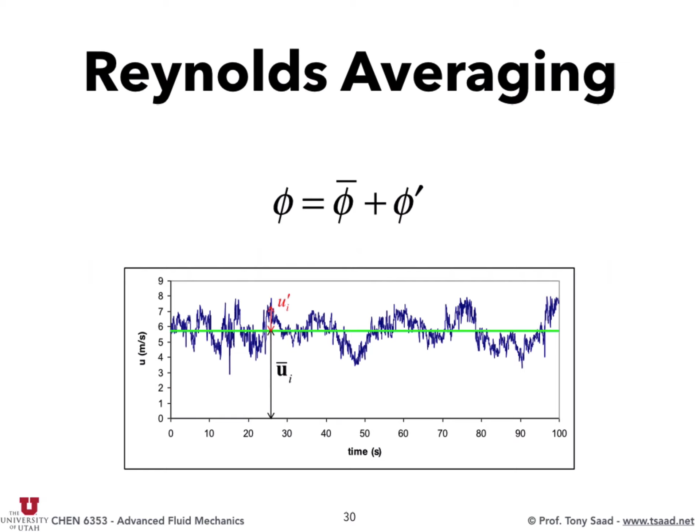However you define that average, it needs to satisfy certain properties. These are the two notations for the average: phi bar, or brackets of phi.

The key property of averaging — and I mention this because there's another procedure called filtering, which doesn't obey the same properties as averaging — so it's important you remember what we mean by averaging.

The average of the fluctuations needs to be zero. That's a key property of averaging. So the way you construct and structure your average needs to satisfy this property.

You don't know what phi prime is, but we know how to construct the average based on the basic equation: the average of the average needs to equal the average. If you do it that way, then the average of the fluctuations equals zero. That's how you enforce this property.

If you take the average of the definition, you get phi bar on the left, and phi bar bar plus phi prime bar on the right. If phi bar bar equals phi bar, they cancel, and you get phi prime bar equal to zero.

The average of the sum is equal to the sum of the averages. The average of a constant times a field equals the constant times the average of that field, where A and B are fields, not constants. And the average of the gradient of a quantity is the gradient of the average.

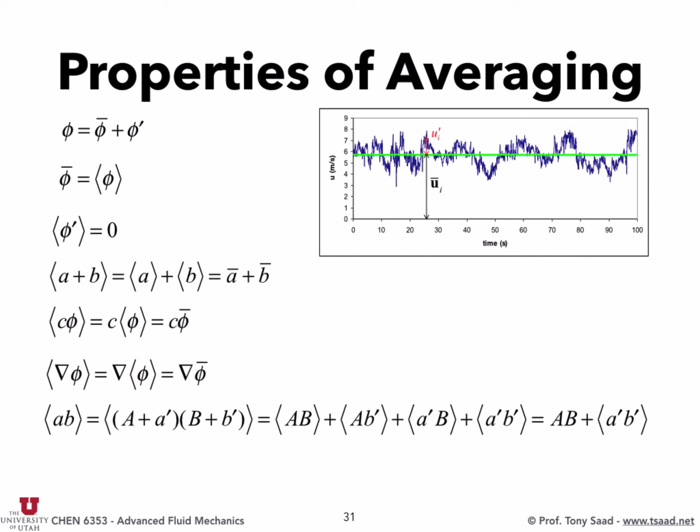So there are several types of averages, which we discussed briefly last time: a spatial average, a time average, or an ensemble average. The ensemble average is an average across experiments — that's my favorite, because it retains time and space dependence.

With a time average, you could lose time dependence depending on the period over which you took the average, which makes your equations steady. When you do an ensemble average, you get an unsteady set of equations instead.

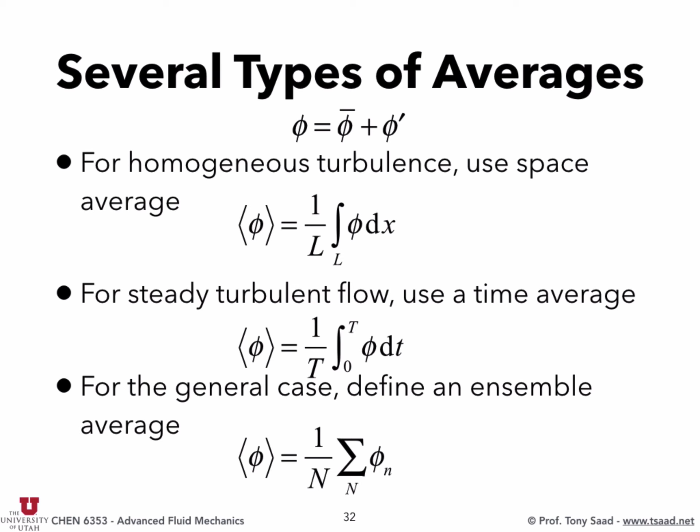The next step is to apply the averaging procedure to the Navier-Stokes equations. We can either substitute U as U average plus U prime and pressure as P average plus P prime and see what happens, or just take the average of the equations themselves — both give the same answer, but it's easier to take the average of the equations.

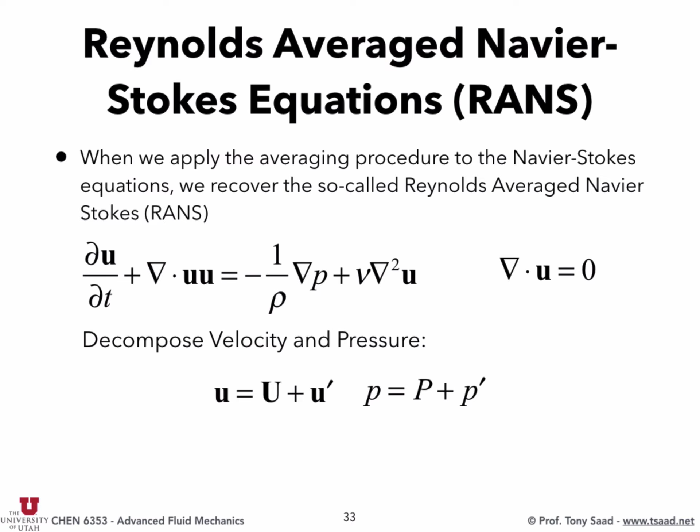So we start with continuity. We take the average of the continuity equation.

Average of div u is div of average u, which means div of the average is equal to zero. In other words, the averaged quantity still obeys mass conservation.

Now why are we doing this? Let's step back for a second. What I want now is a working set of equations for the averaged properties of turbulence, and then whatever is left we're going to figure out what to do with. We said we cannot solve the equations for turbulence directly because they're too expensive. So instead, let's write all the quantities as an average plus a fluctuation, and then find transport equations for the average that we can solve, and whatever is left we're going to model. That's the idea behind turbulence modeling, really.

Now another property: if the average velocity is mass conserving, this also implies that the fluctuating velocity is also mass conserving. That's simple, because u is u average plus u prime. Div u equals zero equals div u average, which is also zero, plus div u prime, and that means div u prime is equal to zero. So I may ask you about this in the exam: show that the fluctuating velocity is divergence free.

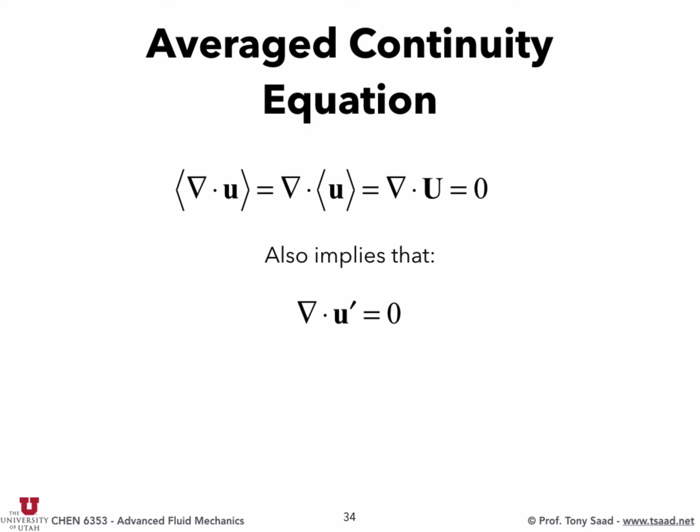Okay, averaged momentum equations. We do the same thing. We start with the momentum equations. Now, before we even do anything, which term do you anticipate is going to give us problems? Yeah, del dot uu, or u dot grad u, right? The convection term. That's going to give us problems because it's a nonlinear term.

The other terms, the average just goes into the gradients, into the nablas, inside the derivative. So when we take the average, we get dU average by dt plus the average of div uu, which is the problem term, equal to minus one over rho grad average p plus nu del squared average u. So when you think about solving for the average quantities, well, these are average quantities we're going to solve for, except for this term. We don't know what to do with this term yet. It's not an elementary quantity, it's a complex quantity.

All right, so that's what we end up with. Remember, I'm using another notation here: I'm replacing the U average with capital values, not U bar. So that's another notation as well. Hopefully this is not confusing.

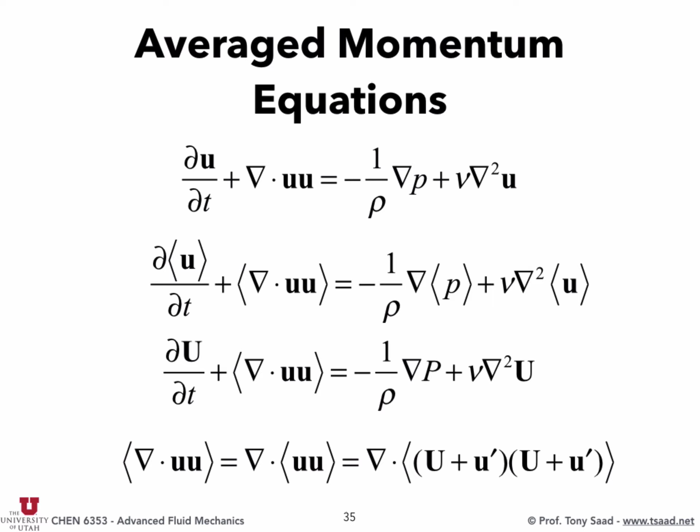So what do we do about the convection term? We have div uu, the average of div uu, and the average goes inside the derivative, giving us div of the average of uu. Remember, this is the total velocity field, including the fluctuations. Then we do the decomposition as u plus u prime, times u plus u prime, and simply carry out the multiplication.

Now what about this term, div of u times u prime? Remember, this u is an average quantity, so think of it as coming out of the average, like a constant, because the average of the average is really the average. So this average comes out, and you get 2u times div u prime. And div u prime is zero, the div of the average of u prime is zero, and div u prime is zero as well. So this term disappears, and you're only left with this guy.

So div uu is in terms of average quantities, and the only unknown term is this one. When I say unknown, I mean the average quantity is unknown, but we can solve for it numerically—you set up your grid and solve for it. But we don't have any equations for u prime. All our equations are for capital U and capital P.

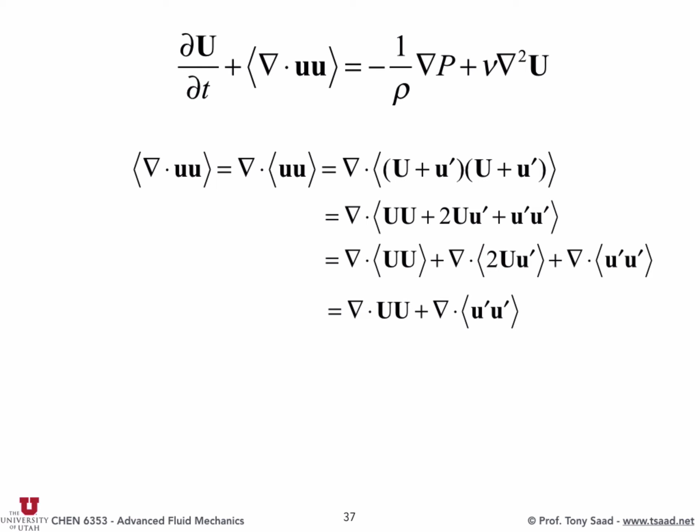So now we look at the average momentum equations. The first few terms look exactly like the Navier-Stokes equations: dU by dt plus div UU equal minus one over rho grad P plus nu del squared U, except that the meaning of U and P are average quantities, not instantaneous turbulent quantities. But then you have this additional term, div of u prime u prime.

Now, u prime u prime itself is a tensor. It's got nine components because you have u prime, v prime, and w prime, and when you combine them you get this tensor—we call this the Reynolds stress tensor because it turns out to have the same units as stress.

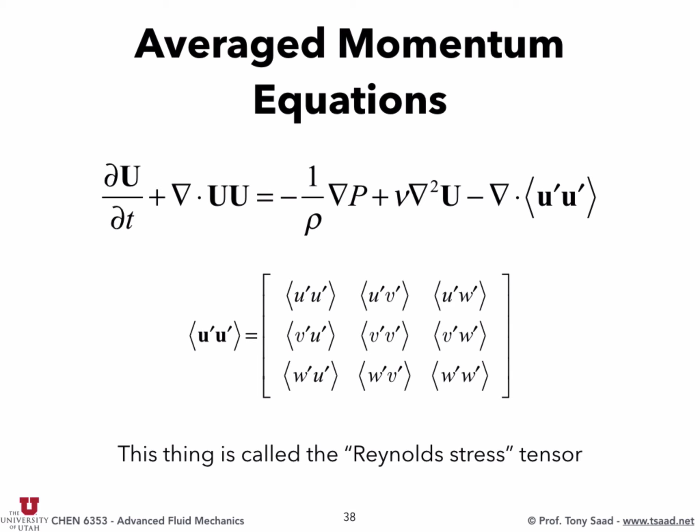Interestingly, although it comes from the convective term, it looks like a stress tensor. That gives us the Reynolds averaged Navier-Stokes equations. So we have div u equals 0, and then Navier-Stokes on the average quantities minus this little term. So now we're almost there. We expressed everything in terms of the average quantities, except we still have an issue.

So how many unknowns do we have here? We have u, v, w, 3 unknowns, p, 4 unknowns. And if this tensor is symmetric, we have 4, 5, 6, 7, 8, 9, 10 unknowns. Agree? So you have u, v, w, p, 4 unknowns, and then 6 coming from the Reynolds stress tensor, so 10 unknowns. But how many equations do we have?

1, 2, 3, 4. So 3 for momentum, it's a vector, and 1 for continuity, same as before. So really, in reality the stress tensor - I made a mistake. These are 3 additional unknowns, not the product terms themselves - it's u prime and v prime that are the unknowns. So we have really in total 7 unknowns: u, v, w, p, and then u prime, v prime, and w prime. So 7 unknowns, not 10.

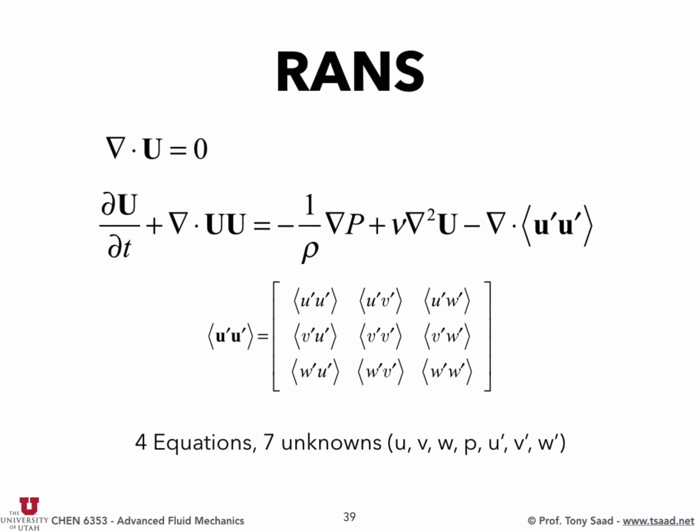So that gives you 4 equations and 7 unknowns, and that's called the turbulence closure problem. If you've heard someone talk about turbulence closure, that's it. When we average the equations, we end up with these nonlinear effects of turbulence that we have no equations for. We don't know what to do with that term.

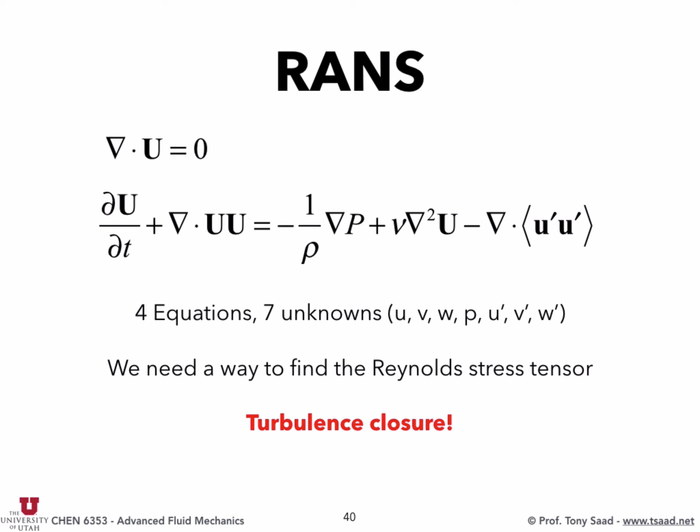To generalize the notation a little bit, since we said this looked like a stress tensor, we're going to give it the same notation we used before, and rewrite the equations this way. We'll put the stress tensor - remember our molecular stress tensor, molecular diffusion, looked like div tau - and then we're going to call the turbulent stress tensor div u prime, we'll call it tau turbulent. That's the turbulent stress tensor, the Reynolds stress tensor.

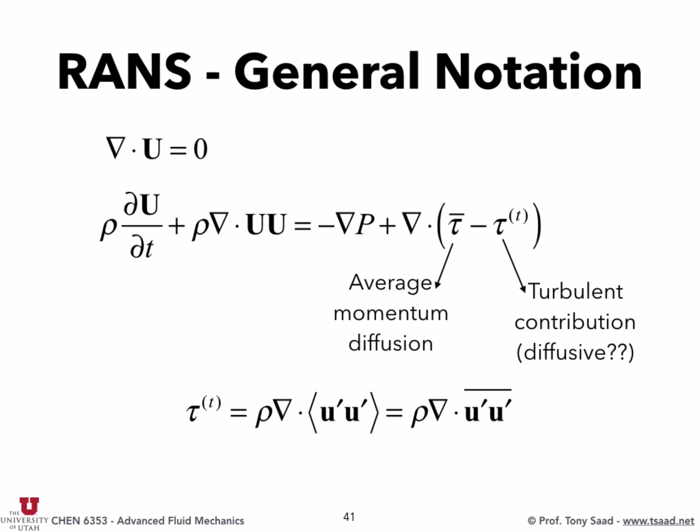Now, I'm writing it this way because it's going to help us think about what we're going to do with turbulence models. But we still have a closure problem - we don't know what tau turbulent is.

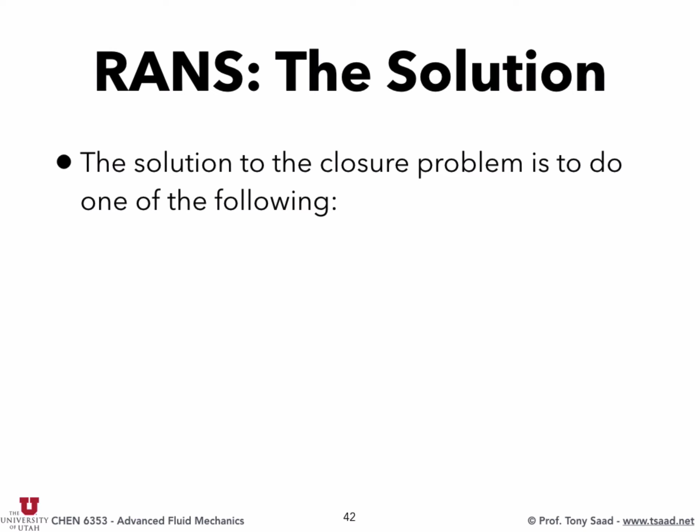So how do we solve the closure problem? We either model the stress tensor - say tau turbulent is equal to tau molecular. Why not? It looks like a stress tensor. Turbulence is in effect a dissipation mechanism, so the effects of the Reynolds stress tensor should be dissipative in nature, and therefore similar to molecular dissipation. So why not model it as something equivalent to the molecular stress tensor? That's one model.

Or, we can develop more equations for the stress tensor. But what does that mean? We developed an equation for the mean, and that gave us an unknown, u prime. Now if we develop an equation for u prime, we're going to get an unknown for u prime and v prime, a triple correlation. And if you develop an equation for that, you get a quadruple correlation, and so on. But you will always have the closure problem - you have to stop somewhere and model that term in the end.

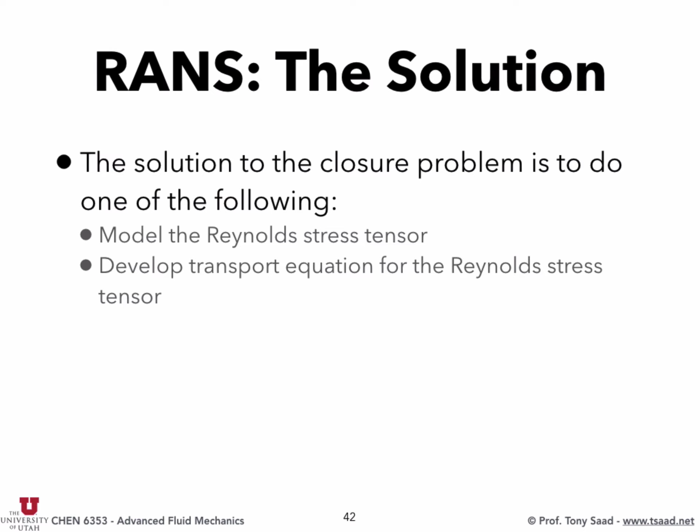It just gets really complex. We're going to go over all of these models - we're skimming the surface here, just to give you an idea of what turbulence modeling is about. It's a big field; people dedicate their lives to developing turbulence models.

Now, what's generally adopted in the community are two classes of models: first order and second order models. In the first order models, we directly model the double correlation u prime, u prime. So although that's a second order moment - if you know some statistics, u prime u prime is a second order moment of the correlation function - that's what it's called, but we attack it directly, so we call it first order, attacking directly on the second order moment. The second order models attack the triple moment, the triple correlation, the third order moment.

Now some nomenclature: in the first order models, where we directly model u prime, there are zero equation models that directly model u prime.

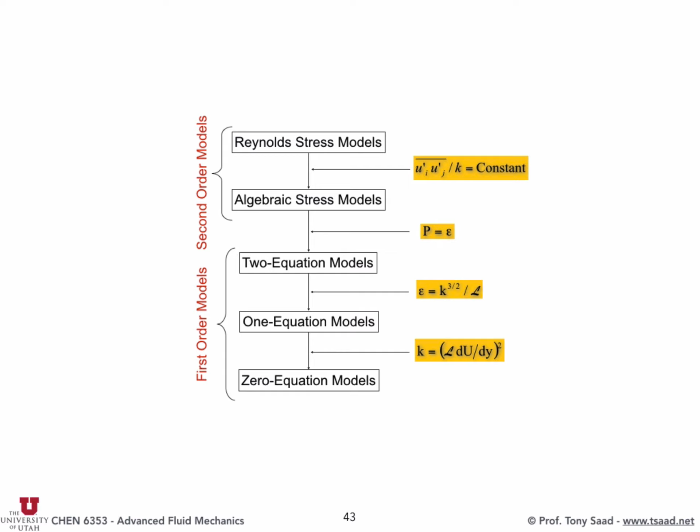There's the one equation models, where you write U prime as a function of something—kinetic energy—and write an equation for that. Then there's the two equation models, like the K epsilon model, have you heard of it? No? Okay, so some have. The K epsilon model is a first order model with two equations. It directly models U prime as a function of two new quantities, K and epsilon, kinetic energy and dissipation rate. We'll look at it, and then write equations for the kinetic energy and dissipation rate, transporting those as well. So it's a hierarchy of models.

First order models directly model the Reynolds stress tensor. It starts with the analogy we just talked about—Boussinesq, I think, came up with that, and then Prandtl picked up on it. They said, well, in general turbulence is dissipative in nature, so the Reynolds stress should probably look like, on average, the Newtonian stress tensor. If the Newtonian stress tensor is given by tau ij equals mu or nu, dui by dxj plus duj by dxi, then why not write the turbulent stress tensor, minus rho U prime average, as some viscosity.

That is different from molecular viscosity—a turbulent viscosity—but multiplied by the strain rate, which measures the average deformation on a fluid element in terms of the average velocities, capital U, which we know because we have equations for those. Those are part of the unknowns we already counted: U, V, W, and P, the four unknowns. So if we can express U prime in terms of the unknowns we're solving for, we're good—we close the system. Think about this: we simply removed div U prime and replaced it with something containing capital U, and that closes our system of equations.

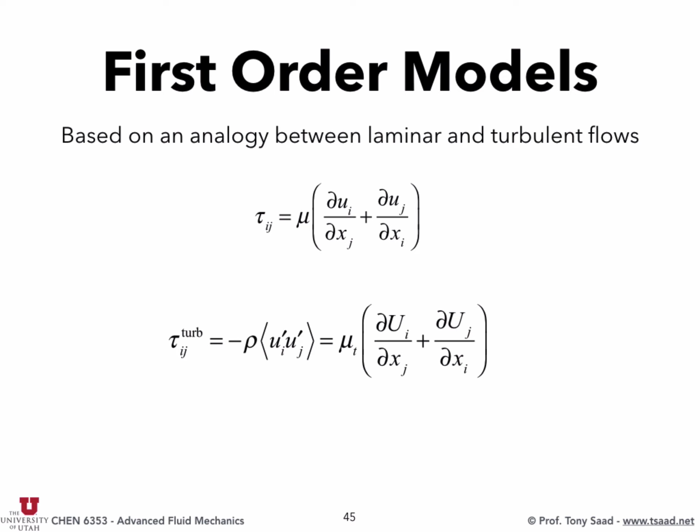The only unknown left is this constant, or thing that may vary in space, mu t, the turbulent viscosity. So the goal of all first order models—K epsilon, K omega, RNG K epsilon, whatever you find—is that they all use this form for tau turbulent. This is fixed, but they figure out fancy ways to compute mu t.

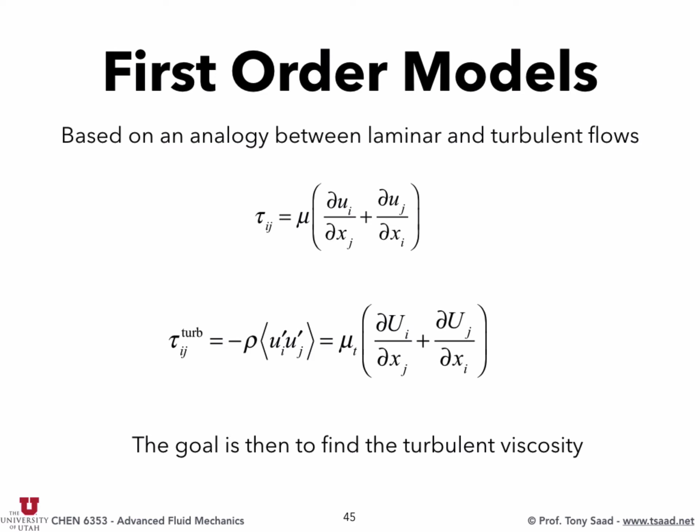When we replace this assumption into the governing equations for incompressible flows, this is what you get: you still have div u equals 0, and you have the Navier-Stokes equations, except that we've augmented the molecular viscosity by a turbulent viscosity. See where we started—something very complex becomes something quite practical. This essentially says that, on average, the effect of turbulence is to dissipate a little bit more, so it's like augmenting molecular viscosity. This is for all first order models.

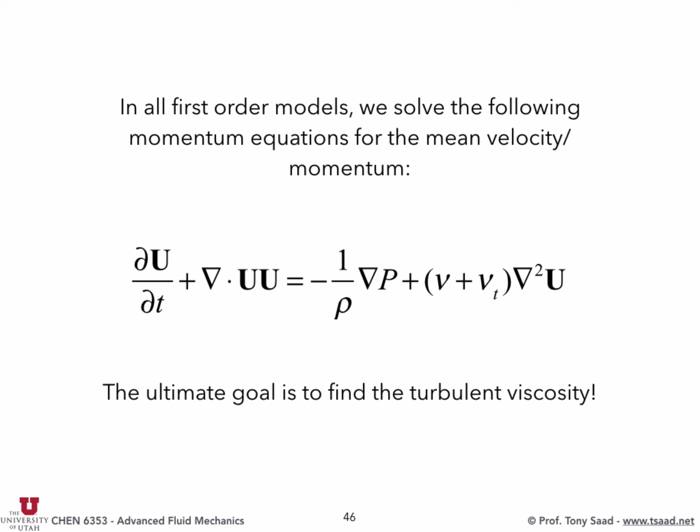Now, the research within first order models is computing nu t or mu t. We start with zero equation first order models. By definition, these immediately express mu t algebraically without solving any extra equations—they give you an algebraic relation, mu t equals something.

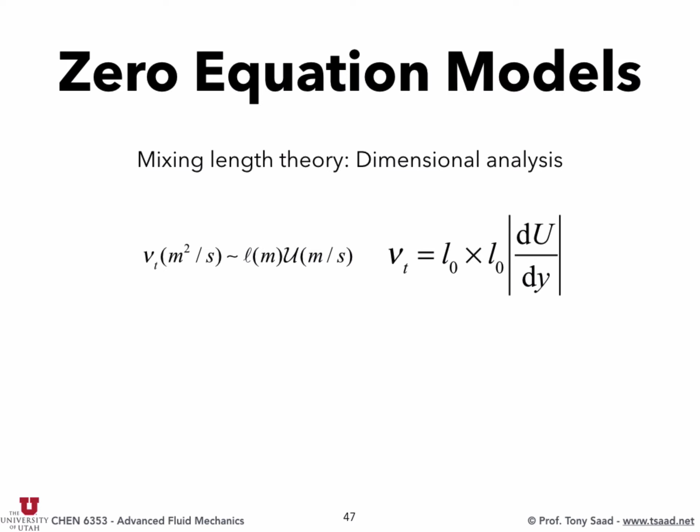This is where Prandtl introduced mixing length theory, which is on average the distance an eddy travels, like the mean free path, before it diffuses. From scaling arguments, nu t is meters squared per second, equal to a length scale times a velocity scale. The length scale is the mixing length—the distance through which an eddy travels as it diffuses—times the velocity scale. Going through the paper, they end up positing this form: a mixing length squared times a gradient of the velocity. This would be a known quantity because we're solving for u, so we can compute du by dy. The challenge is just figuring out the mixing length.

So we moved the problem from mu t to the mixing length. There are numerous arguments from boundary layer theory, from kinetic theory, or just from experimental observations, or making an educated guess. You can fine-tune that mixing length, for example, to test your code against the decay of isotropic turbulence.

We have good observations on the decay of isotropic turbulence. I'm going to fine-tune my mixing lengths so that I capture that decay correctly, set that value in your code, and just apply it, crossing your fingers.

In the end, it's just added diffusion, just added diffusivity. In some problems it may be really important, but for many engineering applications specifically, you don't care that much. It's just a number.

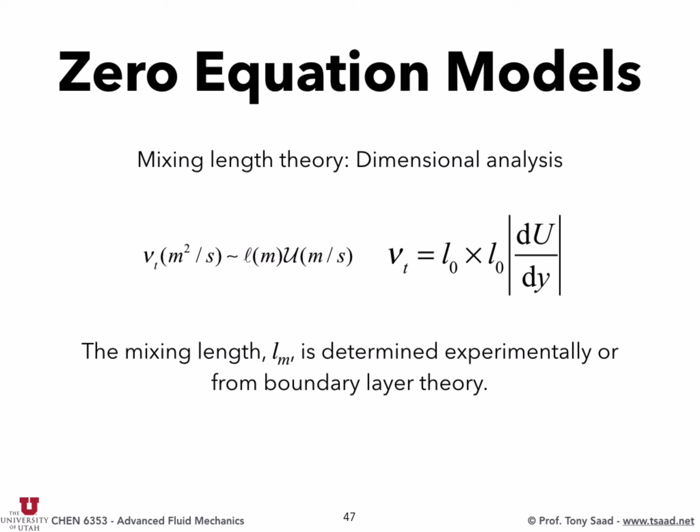Advantages: this is very easy to implement. It's really fast because you're still solving the Navier-Stokes equations. You just augmented the molecular viscosity by a turbulent viscosity, equal to a number times the gradient of the velocity—the mixing length times the gradient of the velocity. So it's really simple to implement, fits within any standard code, you don't have to write any new equations. We can do this from the input file in my code, in Wasatch.

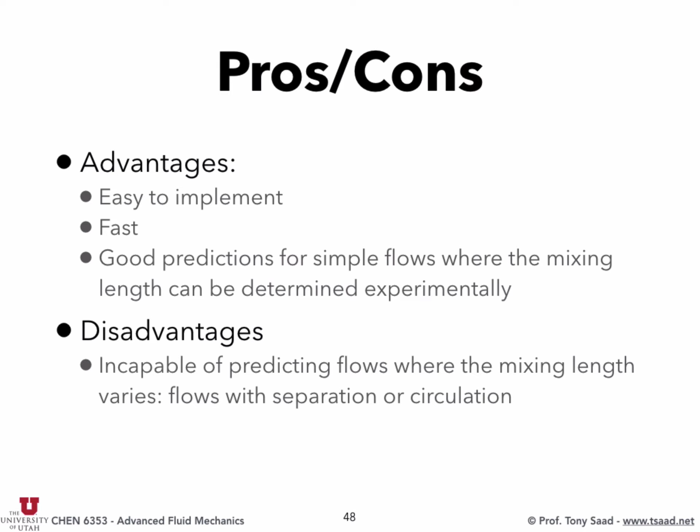Good predictions for simple flows where mixing length can be determined experimentally. The problem is it's incapable of predicting flows where the mixing length varies, like where you have separation or recirculation flows behind blunt bodies, etc. But people still apply it there.

So now we go to the one equation model. The next level in the hierarchy is to express the turbulent viscosity in terms of another quantity that we transport—meaning a time-dependent differential equation. So the one equation models, as the name designates, the goal is to express the turbulent viscosity in terms of a quantity that we write an equation for. But we're still first-order models, because the first-order model directly models the Reynolds stress tensor.

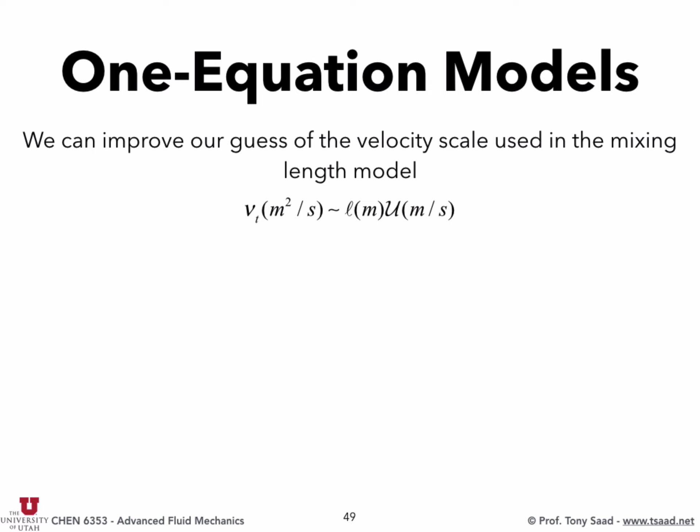So again, nu t is L times u, that was the mixing length. We can improve our guess on the velocity scale using the mixing length. Previously we said u, the velocity scale, was L times du by dy. But what if we pick another scale for the velocity? One quantity is the turbulent kinetic energy. Obviously kinetic energy is very important in turbulent flows, so why don't we model the velocity scale as a function of the kinetic energy?

The idea is you write u, the velocity scale, as the square root of the turbulent kinetic energy. And what is the turbulent kinetic energy? It's a function of a scale, one over two u prime—this is the kinetic energy of the fluctuation. That's what's important here. But we don't know what u prime is, and we don't care about that.

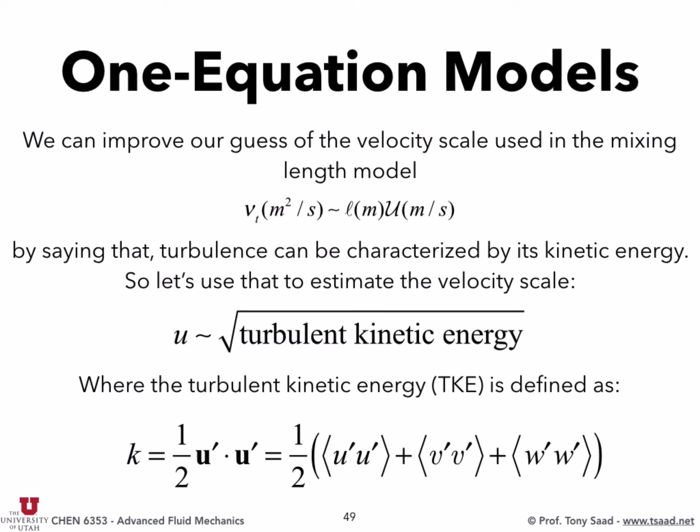So that's the equation for the transport of the turbulent kinetic energy. Think again about what we did here: we said nu t is still equal to a mixing length, which we still have to compute somehow from experiment or a guess. But then we replace the velocity scale by the square root of the turbulent kinetic energy. But where do we get the turbulent kinetic energy from? We need an equation for that.

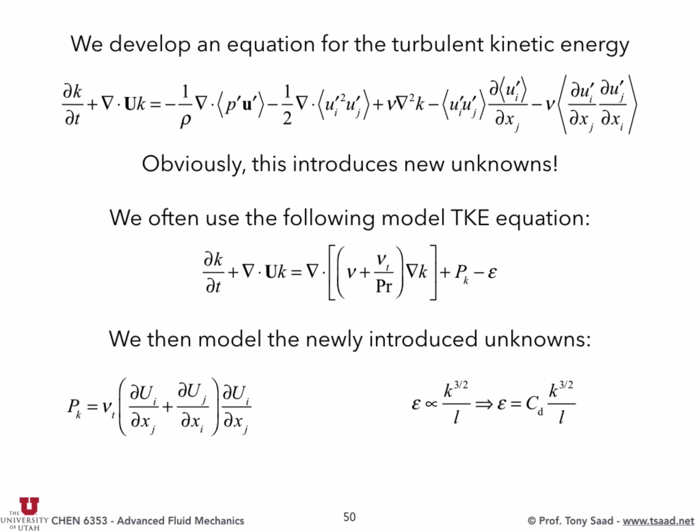With scaling arguments, we say the turbulent viscosity needs consistent units. This is meter squared, this is meter to the fourth per second to the fourth, and this is meters squared per second cubed. So that gives you meter squared per second for nu t. This ratio of kinetic energy squared over the dissipation rate is what the two equation models use, and that's the K epsilon model, K and epsilon.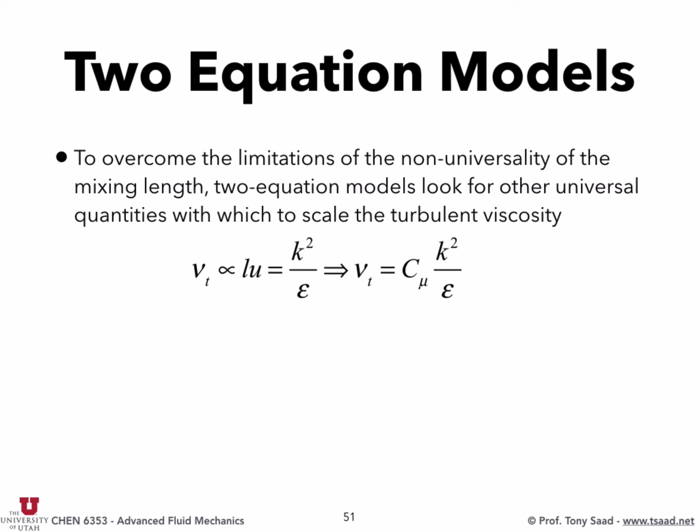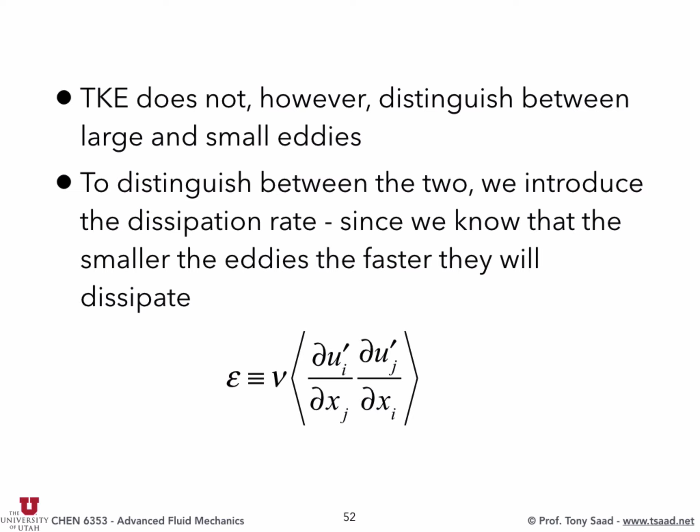Now we've introduced two new unknowns, K and epsilon. So obviously we need equations for those. By the way, by definition, this is the dissipation rate, the rate at which turbulent eddies dissipate. Just a definition. And that gives us the K epsilon model.

So now we have two equations. We introduced two new unknowns, K and epsilon. We need equations for those because obviously kinetic energy changes in space and time, and so does the dissipation. The dissipation is going to be higher when there are small eddies, and lower when there are large eddies. But kinetic energy can have the same value for both. So with K and epsilon, we can account for the difference between large and small structures.

So these are the equations. There are a ton of approximations introduced here, because obviously those are going to have a lot of unknowns, like we've shown for the kinetic energy equation. I'll give you the slide so you don't have to worry about writing all of this. But this is the K epsilon model. On top of continuity and momentum equations, so four equations, you solve two more equations.

These are very easy to solve numerically because they're just scalar transport, just moving them in time. You have everything on the right-hand side, you advance in time. Very easy to implement. This is the most popular turbulence model in the world, the K epsilon model. You open up a simulation, you have turbulence, turn on the K epsilon model. That's pretty darn good, one of the best models out there.

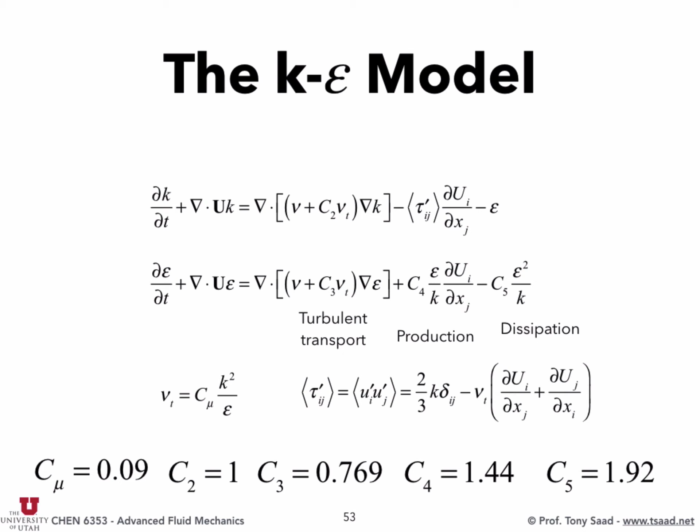Its competitor is the K omega model, but it has a very similar flavor. When you see K epsilon model, just pick the K epsilon model. It's pretty darn good, it's my favorite turbulence model when I'm doing RANS. This is Reynolds averaging. My favorite turbulence model overall is large eddy simulation, which is something different we'll talk about. K epsilon model is easy to implement, always leads to stable calculations. All RANS models are pretty darn awesome.

They always converge because you're adding so much diffusion, and diffusion has a stabilizing effect. It just diffuses crazy gradients. You have a sharp gradient, it automatically diffuses it.

Good predictions overall, but poor predictions for swirling and rotating flows. Nobody really cares about that, though.

They still use turbulence models, unless you're designing wind farms, like what Professor Sutherland was talking about the other day. Then you would have to worry about getting into the finer details.

It depends on what you're after. If you want to resolve the fine details around a drone, or the rotors and blades, you probably don't want to use the K epsilon model—you probably want DNS over there. But if you want the average properties of how the flow looks, just slap on the K epsilon model and you'll be just fine.

A bunch of other flows with separations—again, that's a problem with the mixing length approximation anyway. Governing equations may be stiff in some regions of the flow, but still we can use implicit schemes. The kinetic energy approaches zero near the wall because you're trying to satisfy no-slip over there, but there are models for that, near-wall models. All of these are fixable issues.

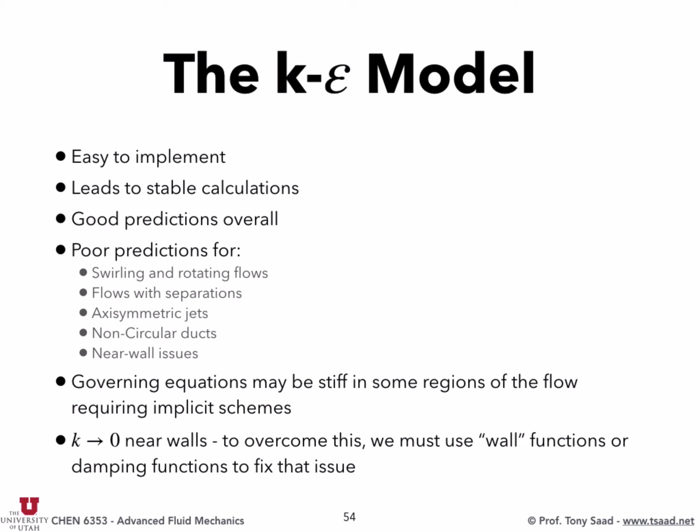Other two equation models. So we're still with the first order models, which directly model the Reynolds stress tensor as a turbulent viscosity times the rate of strain. All of these—zero equation, one equation, and two equation models—try to model the turbulent viscosity.

Zero equation models directly posit a form for the turbulent viscosity: mixing length squared times velocity gradient. The one equation model expresses the turbulent viscosity as a function of the kinetic energy and writes an equation for the kinetic energy. The two equation models express the turbulent viscosity in terms of K and epsilon, or K and omega, or two other quantities, and write equations for those two other quantities. Examples include the nonlinear K epsilon model, realizable K epsilon model, renormalization group theory, K omega, etc.

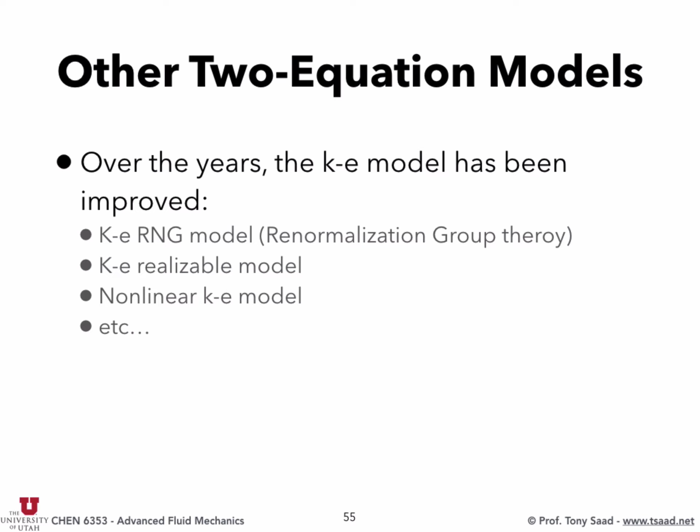Now, some may be interested in scalar transport, so I'm going to put a slide about this very quickly. Similar to momentum, scalars are transported by fluid flow, and this is very important. Scalars are also affected by turbulent flows.

Think about the velocity as transporting a quantity like temperature. If the velocity fluctuates, the temperature will fluctuate as well. As a working model, I'll give you a simple advection diffusion equation for temperature. The same way we decompose the velocity into average plus fluctuating, we're going to decompose the temperature into average theta—since I can't use capital T for average, and lowercase t is reserved for time—plus a fluctuating temperature T prime. Then you take the average of the equation above.

The problem term is going to be the advection term, because the average goes straight in for all the other terms. You get a problem here with the average of u times t, same as what we did before. This gives you u times theta—the product of the average velocity times the average temperature—plus the average of the product of fluctuations. This is identical to what we did before: we recovered the original equations, except everything is now average, and we added a term that showed up because of turbulence.

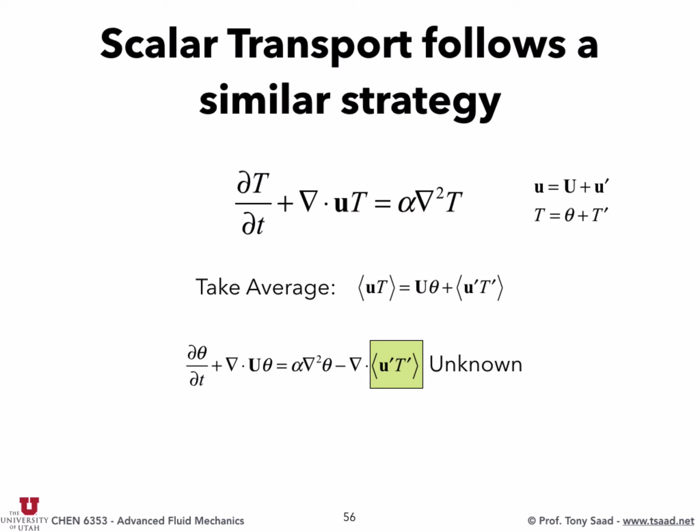In momentum, we said the Reynolds stress mimicked diffusion—mimicked the Newtonian stress. Think of this as something similar. What is the effect going to be—is it going to be similar to this term, do you think? Yes, that's the same hypothesis: just like for momentum, the Reynolds stresses represent diffusion. For scalars, this unknown term, the stress equivalent for scalars, is also a diffusive process. So why don't we model it just like a Fourier diffusion term, called the gradient hypothesis?

So we say u prime t prime—remember this term is div alpha grad theta, right? That's the standard form if you have a nonlinear diffusion coefficient, written as div k grad t. So what if we model this term as a turbulent diffusivity times the gradient of the average? That's how we close the system.

Typically, when you substitute this back in, and assume alpha t is constant, you get an augmented molecular diffusion: alpha plus alpha t, del squared theta. Same idea, same concept—is it starting to ring a bell? We could have set out from the beginning by saying we're going to model turbulence, solve for the average quantities, and augment molecular diffusion by a turbulent diffusion.

Now, how do we compute this? The reason we don't need fancy models here is that we can relate the turbulent diffusivity to the momentum diffusivity via the Schmidt number. So you spend a lot of effort computing the turbulent viscosity, then you set a Schmidt number, 0.71, and from that you back calculate the scalar diffusivity.

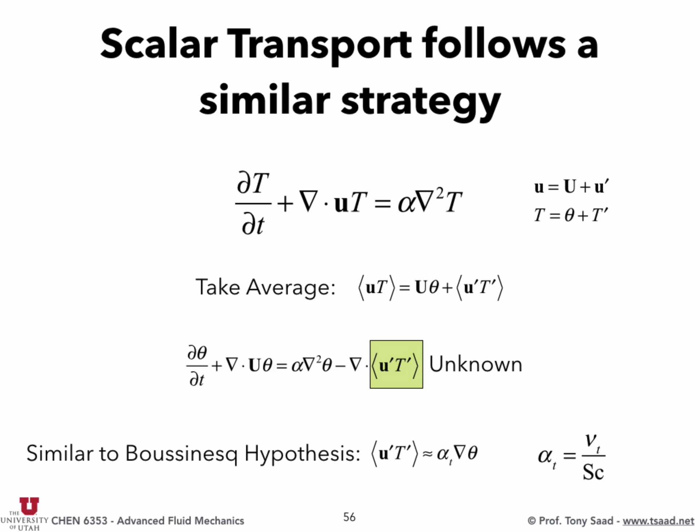Second order models are very complicated and annoying. We don't even have enough slides to put the equations down, or like 20 pages for the Reynolds stress model, really complicated. But the idea is, rather than directly modeling the second order moment, u prime, let's write a transport equation for it.

That is going to give you a triple correlation, ui prime, uj prime, uk prime, which is unknown as well. So we would have to either write an equation for that, making us a third order model, or model that triple correlation. That is much, much harder to think about.

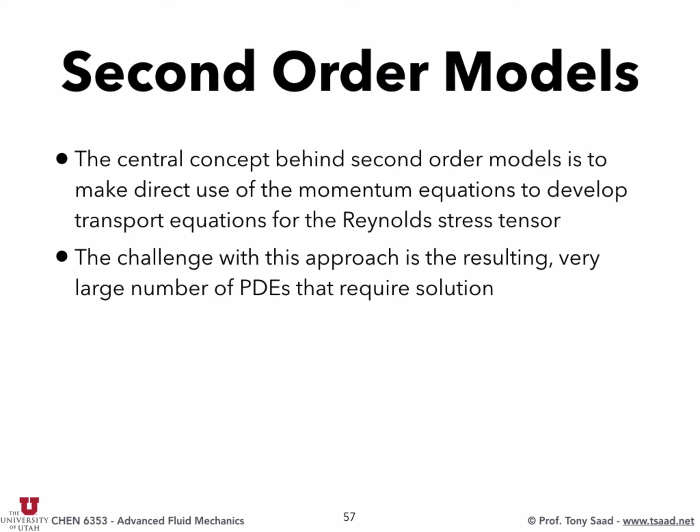The problem with this approach is that the number of partial differential equations you have to solve just explodes, and I don't see anyone using this beyond academic circles. Fluent has a Reynolds stress model, but I don't think anyone even cares about using it. But the beauty of the Reynolds stress model is it captures anisotropic effects. That's been proven. So what are anisotropic effects?

Naively, isotropy is wherever you look, you see the same thing, right? Things on average are the same. Like the universe is isotropic - you look in that direction, there are stars, galaxies, supernovas, black holes. You look in another direction, stars, galaxies, supernovas, black holes, right?

But anisotropy is like you're in a piece of wood, for example. If you look in one direction, the fibers are aligned that way, and you look the other direction, it's all wood everywhere, so it's homogeneous, but it's anisotropic. So if you apply tension to the wood that way, it's going to break much easier than if you take a 2x4, clamp it, and try to break it aligned with the fibers. That's an anisotropic material, from the perspective of the stresses.

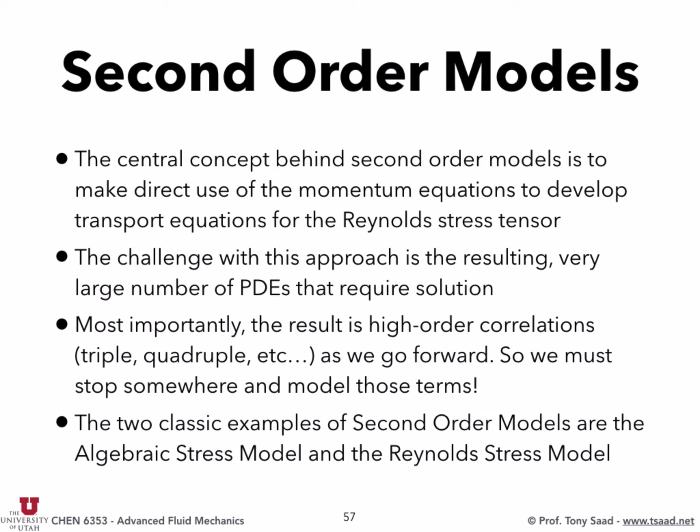Same thing - turbulence is generally anisotropic. You look in different directions, gradients are going to be different, you're going to have different length scales. However you define anisotropy, turbulence is generally anisotropic. So the Reynolds stress model will capture this anisotropy. You write an equation for the second order moment, but then you end up with terms that have third order moments, and those need modeling.

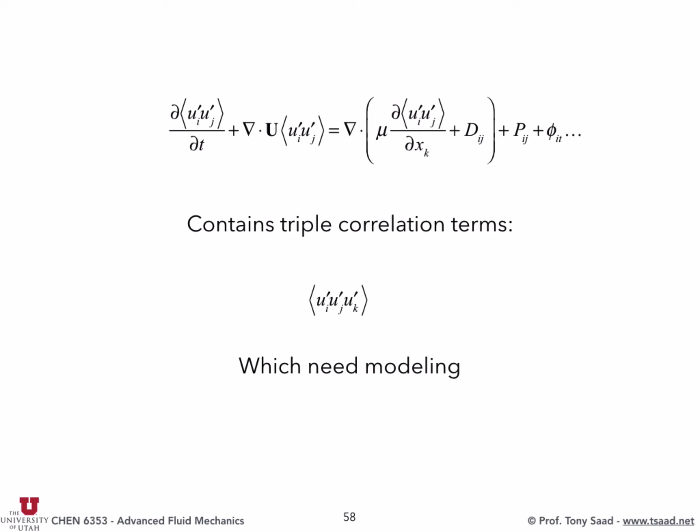So in second order models, you model the triple correlation, or write one equation models for those, or two equation models for those, and so on. In third order models, you write an equation for the third moment, then model the fourth moment, and so on. The Reynolds stress model is very expensive, but it's one of the classic turbulence models.

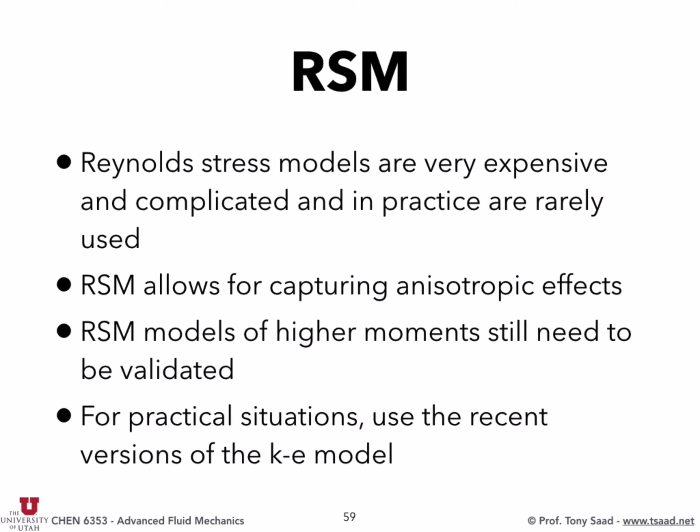I have 6 minutes, and I will introduce you to my favorite and kind of up-and-coming turbulence approach, because it's become much cheaper and easier to compute due to processing power. As we move into more processing and cheaper computing, we're moving away from turbulence models because it becomes easier to capture more of the turbulence. Ideally, with very fast computers, we don't need 5,000 years to solve flow in a channel or pipe - you can compute all of that. So large eddy simulation is kind of the first step towards full DNS, direct numerical simulation.

Large eddy simulation - the idea is, well, we have a grid. If you remember that energy spectrum I showed you in the past, Reynolds averaging models the entire spectrum - all scales, everything, from large to small scales. In DNS, we compute everything, so you have to have a very, very fine grid. In LES, we compute some and model some.

The idea is, well, I have a grid, and I can compute things on the grid. Why don't I compute everything turbulent that grid can capture - all the eddies that can be captured by that grid - and then model everything that cannot be captured by that grid? Remember the eddy drawing I showed you the other day? So let's compute the smallest eddy that can be computed on that grid.

Just solve the full equations there, and anything below that, let's approximate it. But how do you make that separation? With averaging, we said we're going to take an average and solve the average equations. But with this idea, how do you make the separation between the scales that are computed by the grid and the scales that fall through the grid? So we're going to talk about this.

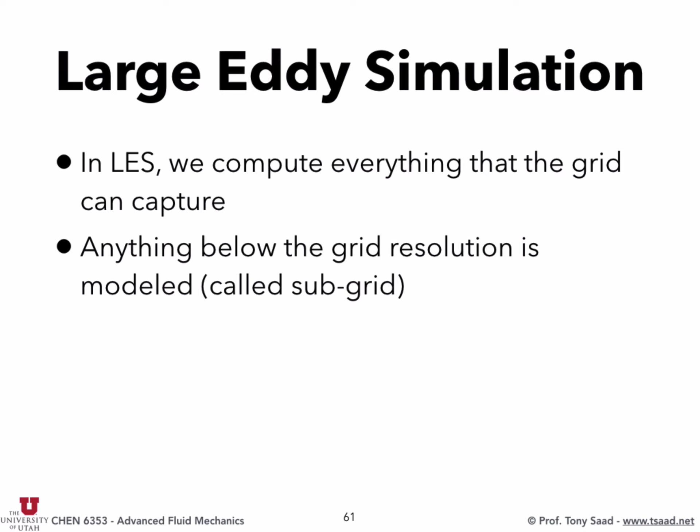In LES, we compute everything that the grid can capture, and anything below the grid resolution is modeled. For things to be meaningful, the grid resolution needs to be large enough, meaning the number of grid points needs to be larger than what RANS can do. Think of yourself moving along the spectrum of kinetic energy. You want to compute as many small scales as you can, and then model everything else.

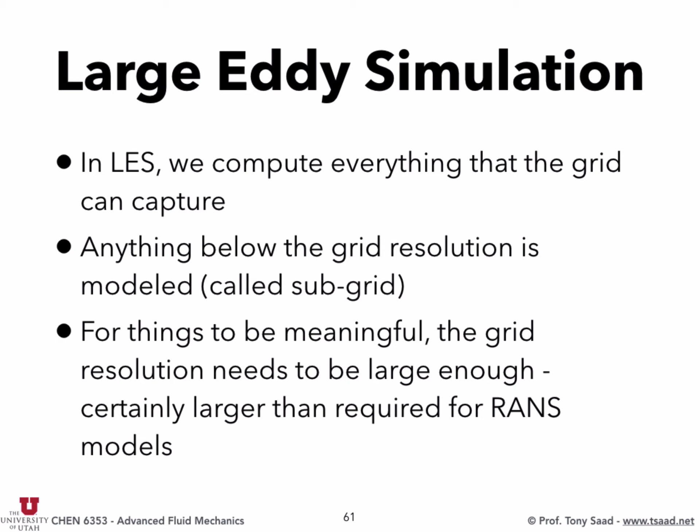Now, to separate between the scales that can be computed and the scales that are not computed, we introduce the idea of the filter. I'm not defining the filter yet, because what's more important to realize is the properties of the filter rather than the filter itself. In the end, the grid is going to be your filter.

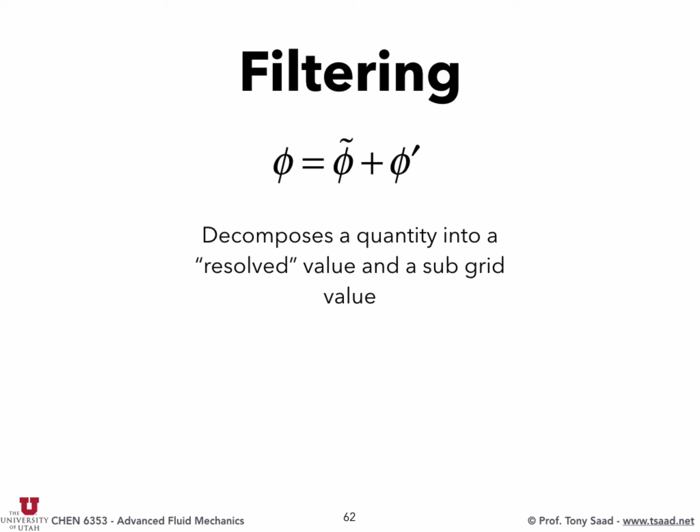Now, filtering looks identical to averaging. You take a turbulent quantity, you write it as a filtered quantity, so that's the quantity captured by the grid, plus the quantity that was not captured by the grid. Same concept. Now think of filtering as a sieve. The finer your sieve, the more pebbles or stones you can capture. The coarser your sieve, the less you're going to capture. Filtering is the equivalent of the sieve.

It's going to capture things that are larger than the sieve width or the filter width. So that introduces the idea that a filter has a length scale that allows it to capture all quantities that are larger than that length scale, and everything below that length scale disappears. That's why the idea of the filter is important. It's a sieve, think of it as a sieve. This actually looks like a grid, like a structured grid, literally. Any eddy that is smaller than the sieve size is going to pass through, and it's going to be a phi prime.

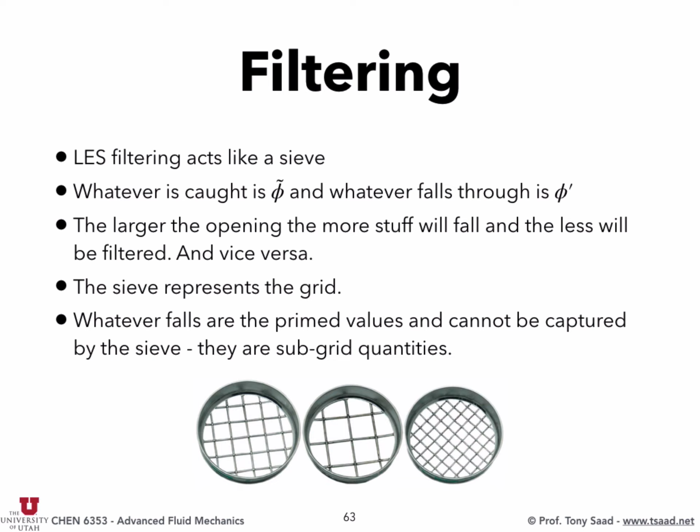More important than the filter definition is the properties of filters. A filter should not change constants. It should be linear, in that the filter of the sum is the sum of the filters, just like an average. But it should also commute with derivatives, so the filter of a derivative in space or time is equal to the derivative of the filter.

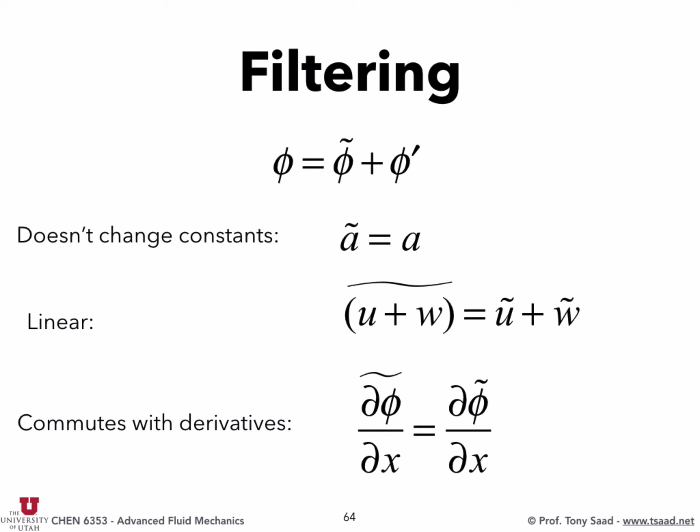But the most important property of the filter—right now it looks identical to an average—except for one thing: the filter of the fluctuation is not equal to 0. With Reynolds averaging, the average of the fluctuation was equal to 0, because you put the average in the middle of the fluctuation, positive and negative, and when you integrate the fluctuation, it gives you 0. The filter is different. The filter says no, my fluctuation—the filter of the fluctuations—is not going to be 0.

Think about it in terms of a sieve. You have a sieve of a certain size, let's say delta. You filter out all the quantities that are larger than delta; anything smaller than delta goes through. Now apply a filter to whatever went through—is it going to be caught or is it going to go through? It's going to go through, because the other filter is still the same delta, and those quantities are smaller than delta, so they're going to go through. So the filter of the fluctuation is not 0. We don't know what it is—that's actually what we're going to have to model, unlike Reynolds averaging, where the average of the fluctuation was identically 0.

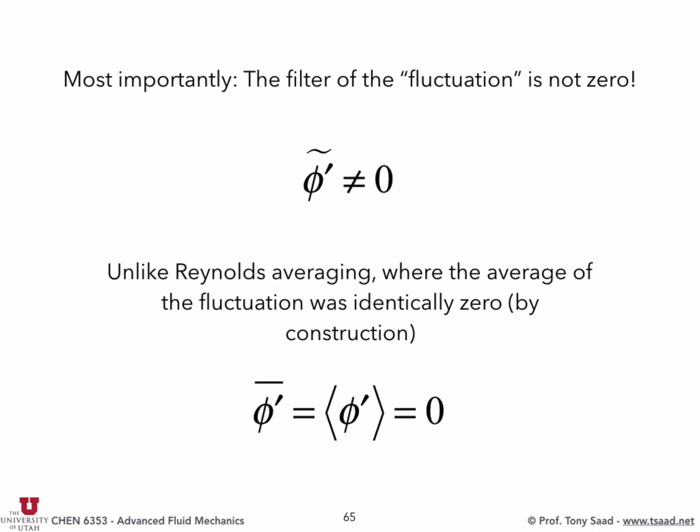So with averaging, there's no idea of the sieve. It's just putting something in between the positive and negative fluctuations, and they add up in a way that they equal 0.